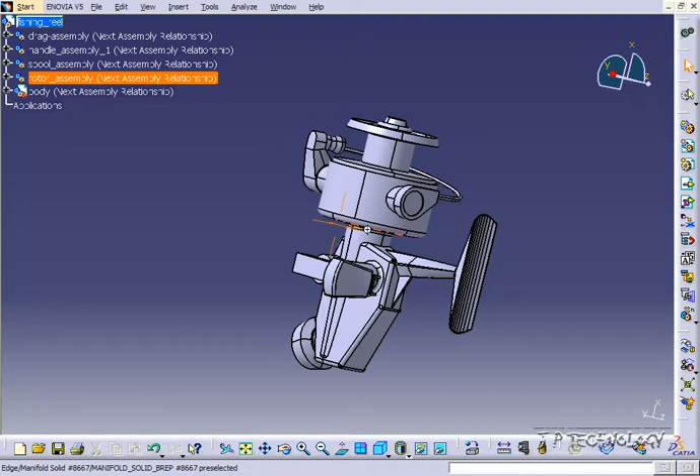So what you have to do is hold down mouse button 2 and then click mouse button 3. Now you can see the icon, the arrows going up and down, and if you push forward, it's going to zoom in, and if you pull it towards yourself, it's going to zoom out. Now try it again. Mouse button 2, hold down, click mouse button 3 once, and you can zoom in and zoom out.

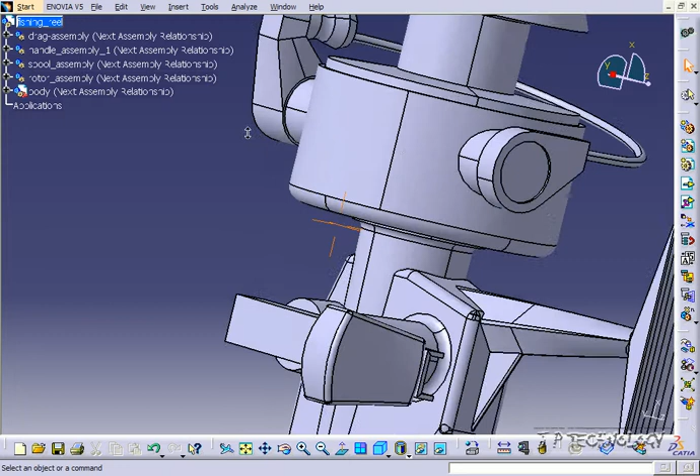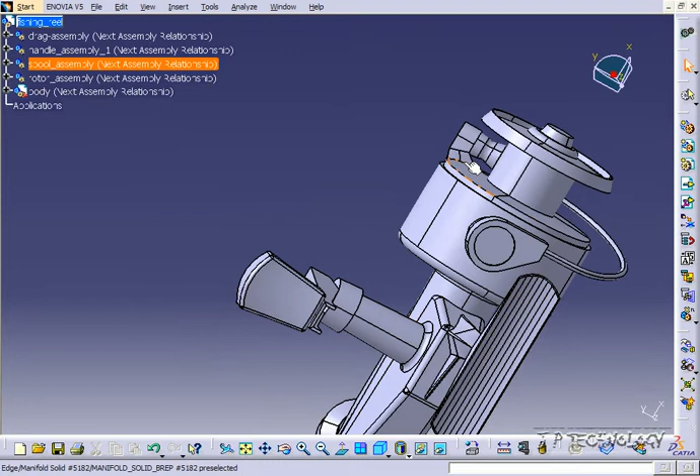Now I'll show you how to rotate with your mouse. Hold mouse button 2 and hold mouse button 3, and you'll have that little hand there. Now if you move it around, you'll see that you're able to rotate and move the whole part or assembly all around. Now let's zoom out, and if you just press and hold mouse button 2, you're able to pan and just move the part around in space.

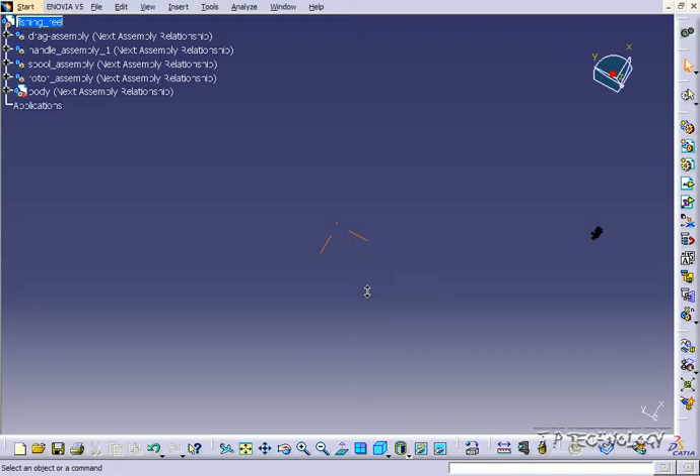So let's hold the part and move it to the right, and then put your mouse to the left and just click mouse button 2 once. What that does is create a new center point of rotation. So if we zoom out a bit more until we can see the part, and hold mouse button 2 and mouse button 3 to rotate and move around, you'll see that we're now rotating on a much larger scale and larger axis. Now pull the part into the middle, zoom in again, and try to rotate again.

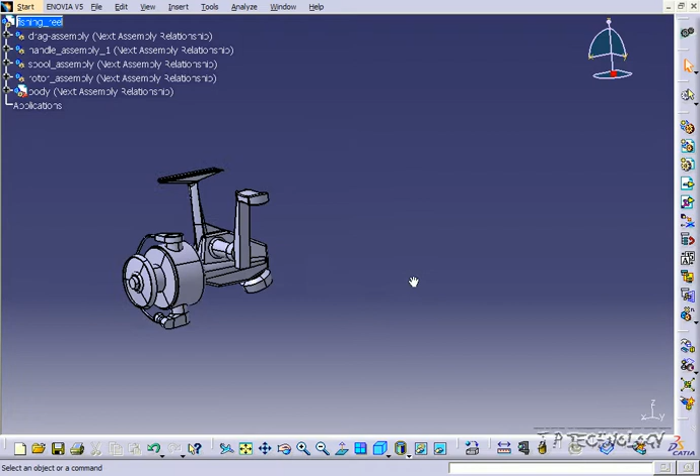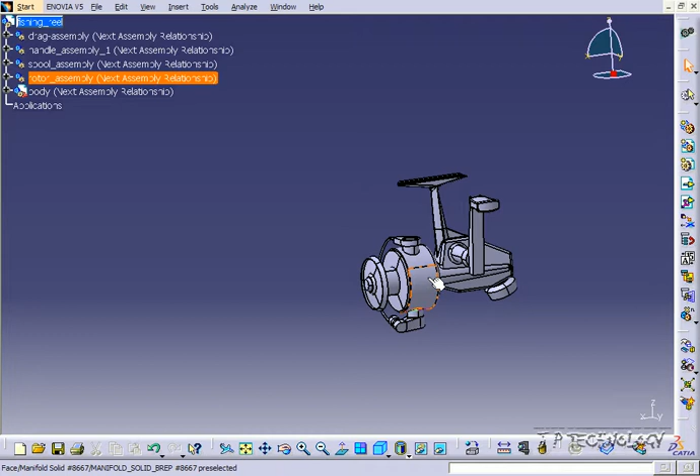Now when we rotate, compared to before, it's very finicky as we're using a much larger radius to rotate around, and you don't get the same results. Now all you have to do to get back to rotating close and tight with your part is click mouse button 2 on the point where you want to rotate around. So say I want to rotate around this bit here, so just click it. Now that's the center of rotation, and your part's going to rotate around there. You can change it to any part or feature on your part or assembly.

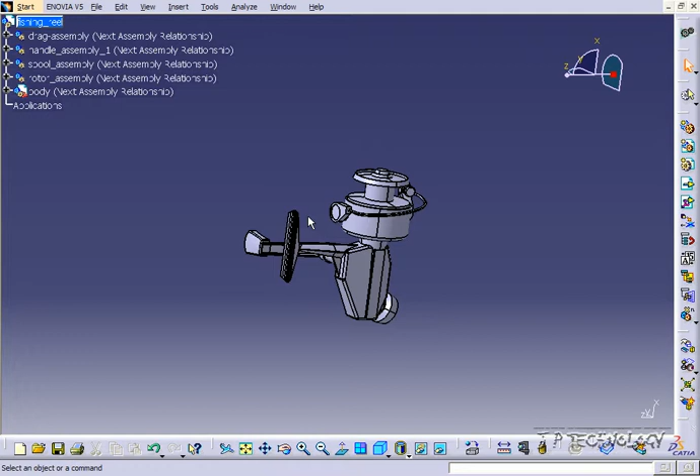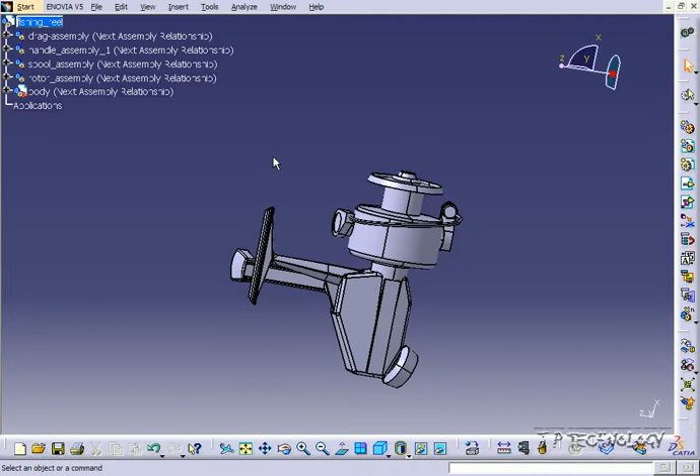So mouse button 2, if you just click it anywhere on the part when you're in a file, it's going to create a new center point of rotation. So again, if we zoom out and click on the side, now we've got a big arc, big circle. When we zoom in and click on the part, now we have a small circle. So it's a very good tool to know how to change your rotation point, because when you're dealing with larger assemblies, your rotation point may be far and you might have limited use, and when you need to focus in on a certain part or feature, you need to click on it to be able to do that.

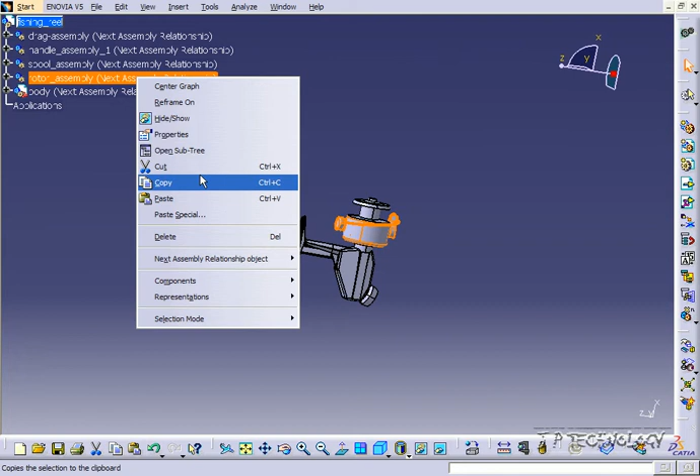And then mouse button 1 is just clicking on the parts and you're able to highlight it. If you click mouse button 3, you get more options. So this is more like in Windows when you're clicking mouse button 1 and mouse button 3 to select an object and get some more details of an object. And that concludes our tutorial on the mouse buttons within Catia v5.